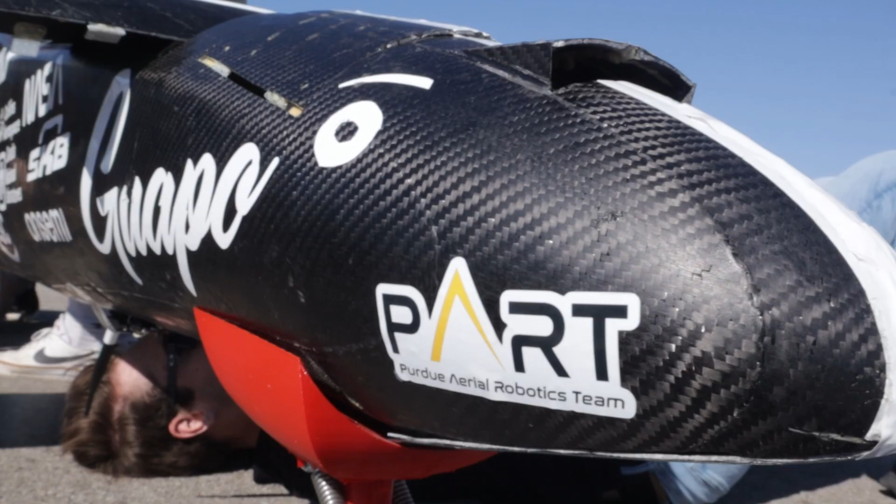Guapo is our 2023 competition UAS, designed, built, and tested by 50 Purdue students in over 10 majors. It is our largest ever manufactured aircraft with a wingspan of 13 feet and a weight of 48 pounds. Manufactured with over 90% carbon composite materials, it maintains a lighter internal structure and stronger overall design. Guapo has extremely redundant communication, hardware, and optics, which allows us to achieve all components in this year's mission.

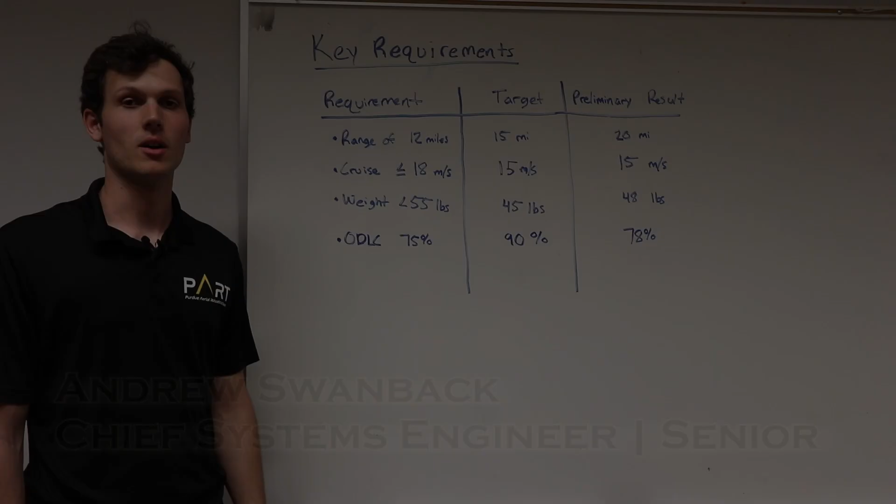So back in September, our team went through the rules and used our past experience to create a list of hundreds of L1 through L3 requirements that would inform the design of our aircraft as a whole. And I'll focus on a couple of the key requirements here and go through the rationale for why we chose them. So we knew from the rules that we'd need a range of at least 12 miles based on how far we might have to fly. So we targeted 15 miles for some buffer, and we are pleasantly surprised to have 20 miles of range so far with our current batteries.

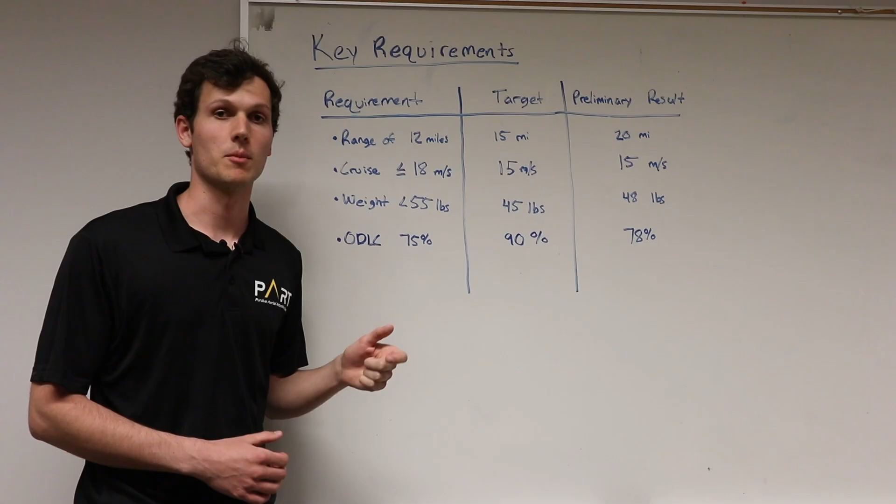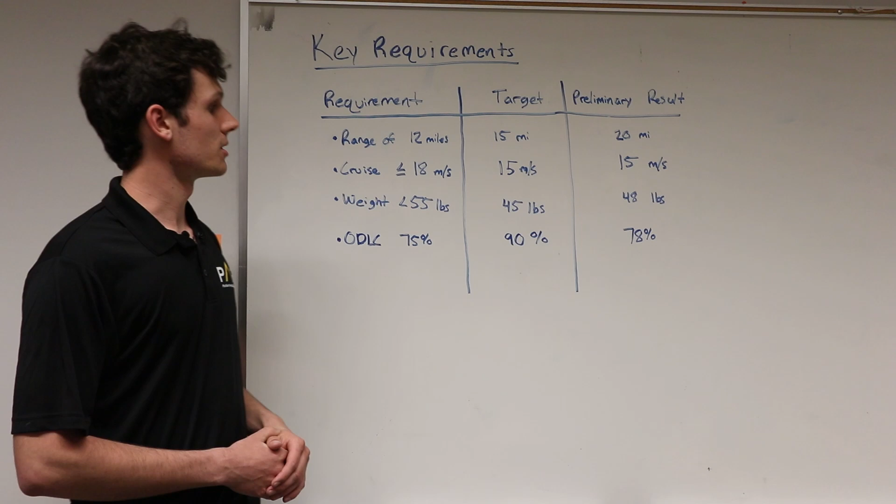We targeted a slow cruise less than 18 meters per second because that's the edge of our motion blur for our cameras for the recognition task. And we targeted 15 meters per second and have hit that value. The weight, we have to be under the FAA 55 pounds. We targeted 45 and we are slightly overweight at 48. And for ODLC, we figure with 3 out of 4 characteristics correct, we can do statistical inferencing and get all 5 of those targets recognized every time. So we're targeting 90% accuracy, but we think 78%, which we're at, will do the job, and we'll be tuning it in the coming month.

Our 2023 UAS package is comprised of 3 main subsystems. We have our ground control station, as well as a ground control station operator, which analyzes vehicle telemetry. We have our flight platform, which includes our physical UAS, as well as a safety pilot. And third of all, we have ODLC, which is mostly computers and algorithms.

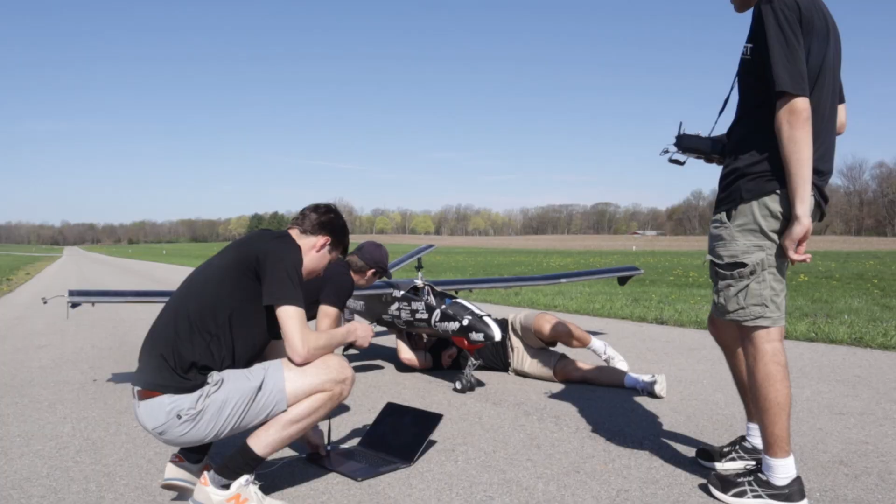One of the new features in our aircraft this year is off-board position control. And what this allows us to do is have more flexibility in our mission due to dynamic path planning. We also have a fully autonomous ODLC pipeline with the option of a manual override from an additional operator in case there was to be failure. Our UAV can be set up and operational in just under 15 minutes and has a flight time of 40 minutes as well as a breakdown time of 5 minutes, putting us well within the time limits of our mission.

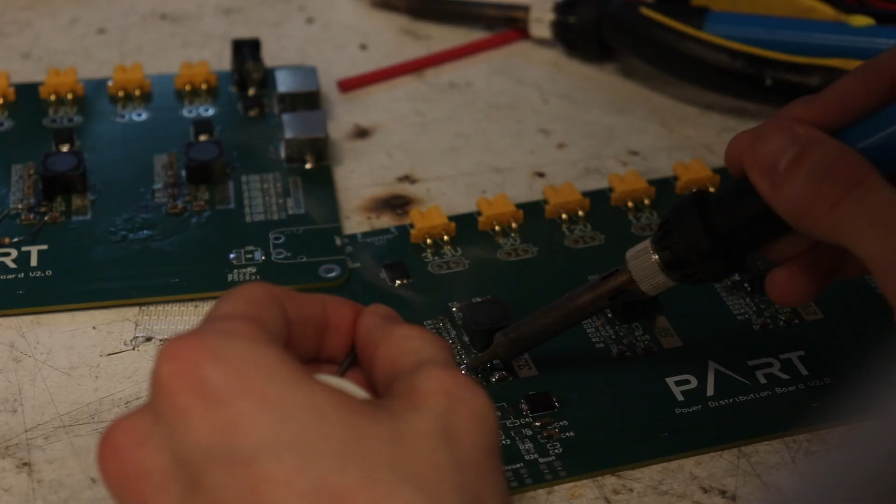The avionics board houses our Pixhawk, which communicates directly to our guidance, navigation, and control. It also allows us to reroute wiring so that we can easily wire the plane. The avionics team had to build many custom boards in order to fit our needs on Guapo. The first board we built was a power distribution board. Many of the components and many of the systems on the Guapo need to have a specified voltage. The power distribution board will receive an input voltage of 12 volts and it will output other voltages based on what those systems need.

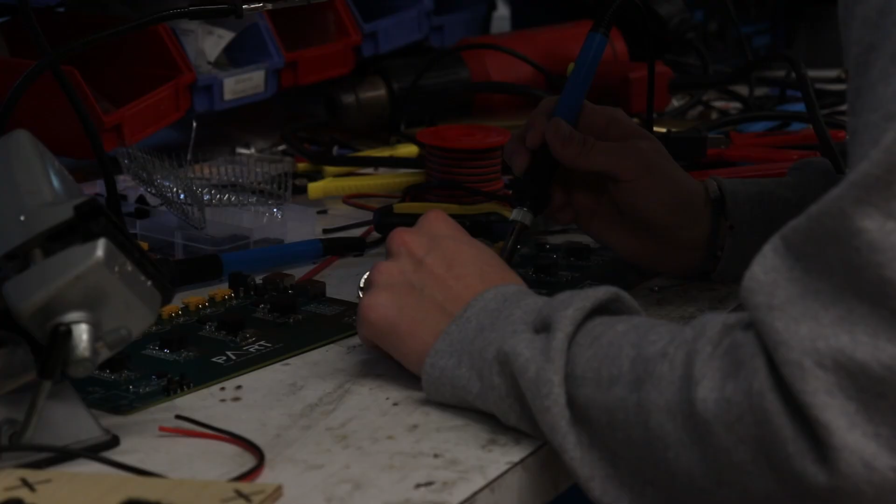Guapo is equipped with a 23 megapixel GoPro Hero 10 that provides our team with 5.3K image resolution. GoPro captures 5.3K video frames. Each frame is then sliced to 640 by 640 images, each of which are passed to a YOLO object detection model that identifies the target and determines its shape. Each target is then cropped and passed to a U-Net segmentation model that segments the target to shape and character. The mean RGB value is then calculated for both the shape and the character, and this value is passed to an RGB color classifier that determines the colors. Finally, all these values are used as inputs to a decision calculator that determines whether to drop the payload or not.

So our payload uses an interlocking mechanism that allows for easy access to the water bottle, and our parachute is spring-loaded. It is released using a time delay computer that begins counting upon the release of this limit switch. So here's an example.

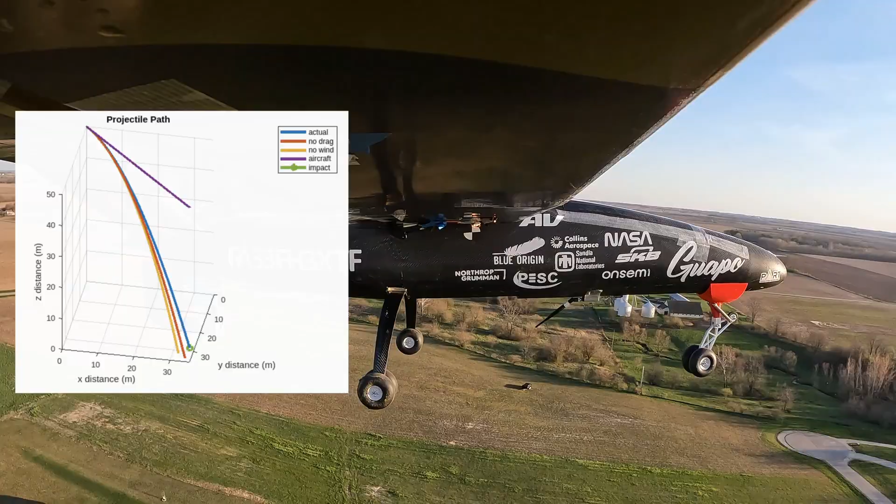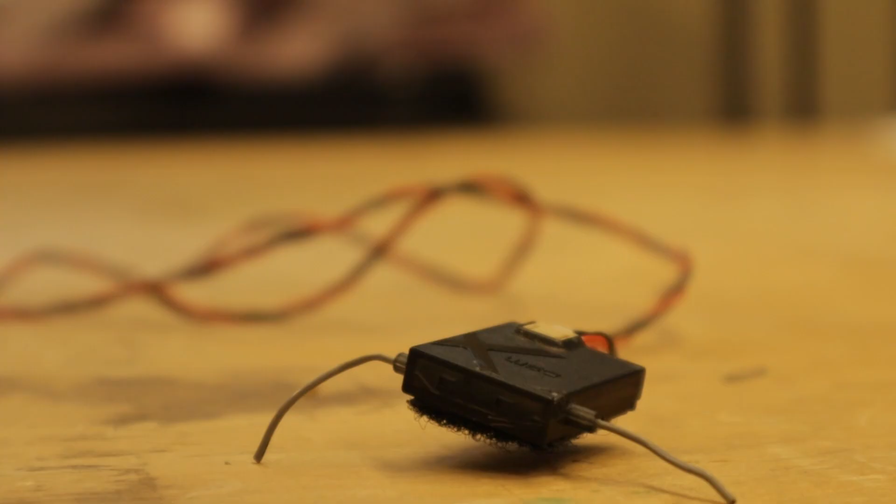The aircraft has 3 different modes of communication with the ground station. Our first mode is a 2.4 gigahertz RC radio connection. This allows the test pilot to take over in the event of an emergency, as well as for takeoffs and landings. The second mode of communication is a 915 megahertz telemetry radio.

This allows the aircraft to connect to the ground station, push telemetry, as well as receive different missions or different waypoints as we need to fly them on the aircraft. This gives us a full connection between the Pixhawk and our QGroundControl system on the ground.

Finally, we have a 2.4 gigahertz data link. Right now we're using omnidirectional antennas on the aircraft and then a directional patch antenna on the ground. This allows us to pull our images from the aircraft, crop them, annotate them, and then push them back up to the aircraft.

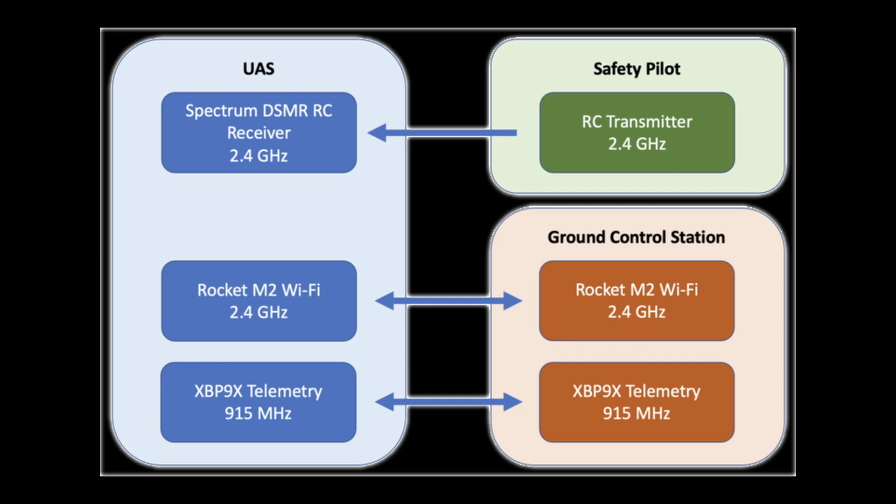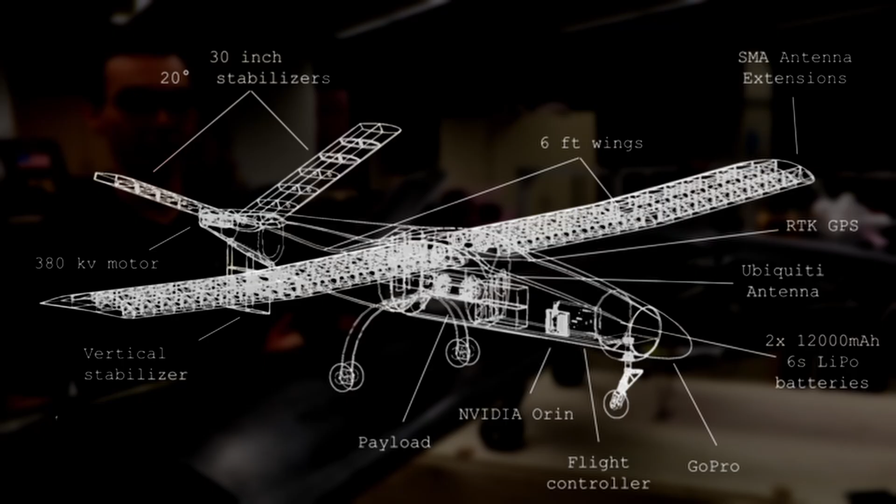Guapo has a 13-foot wingspan with a NACA 6415 chosen for its stall characteristics, featuring a polyhedral in the middle of each wing. Having this polyhedral in the middle allows us to use the same mold for both sides. We can make more with less molds. The control surfaces are split right in the middle of the aileron. This allows us to make custom flaperon mixing within the controls to allow for an easier slow flight capability.

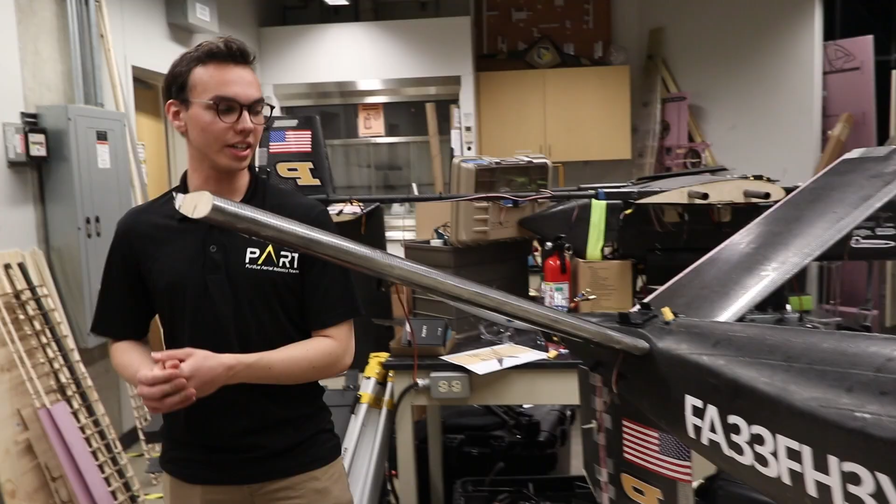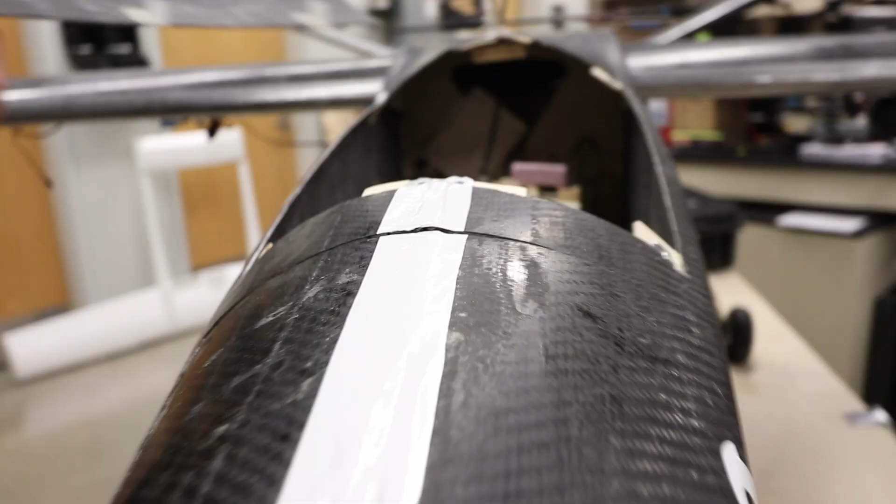As we move to the back of the aircraft, we have a V-tail featuring a 60-inch span on a 20-degree incline. We also have a motor, 380 KV, driving a 22-inch propeller. As we move to the front of the aircraft, we begin to see those propulsion batteries inside of the fuselage. These propulsion batteries are 6-cell, 12,000 milliamp hour each, and this provides up to 15 kilograms of thrust.

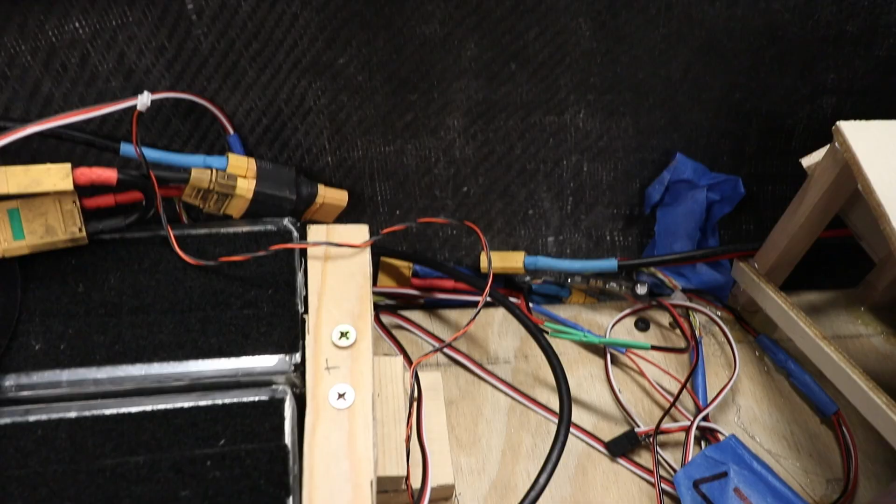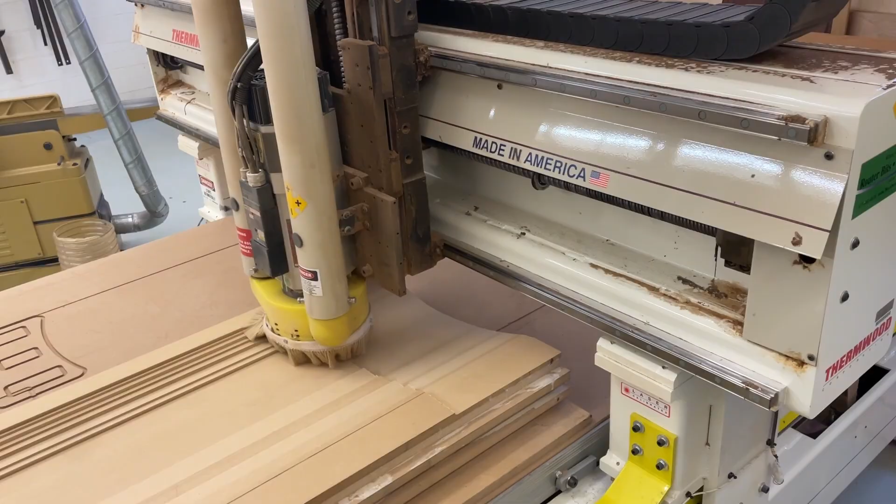At our cruise speed of about 15 meters per second, we can get about 40 minutes of flight with these 2 batteries alone. The landing gear is fully custom, allowing for high damping on a hard landing. The aircraft is fully carbon fiber with plywood internal structures. The fuselage features a core mat material to allow a stronger build, while the wings have a much thinner twill layer.

For autopilot, we're using a Pixhawk Cube. We developed our own breakout board for the Pixhawk Cube to allow it to interface with other devices and not be restricted to just the default breakout board provided by the Cube developers. On the Cube, we're running PX4. This allows us to both run mission or manual flights, as well as running off-board missions where off-board position set points are being sent to the Pixhawk to then fly our plane around.

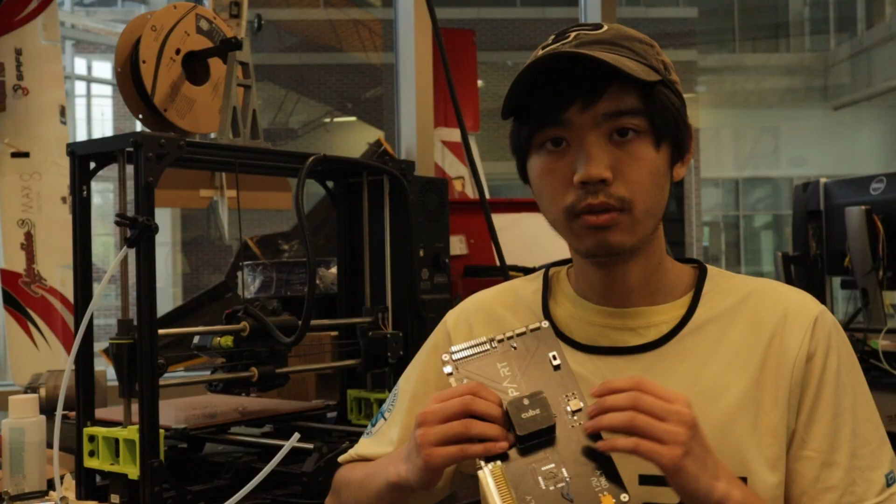For the off-board computer, we're running a ROS node on Xavier that sends positions such as latitude, longitude, altitude waypoints to the Pixhawk, which then in turn, through the Pixhawk control library, guides the plane towards its destination. This allows us to run autonomous missions that can dynamically change as the environment around an airplane also changes.

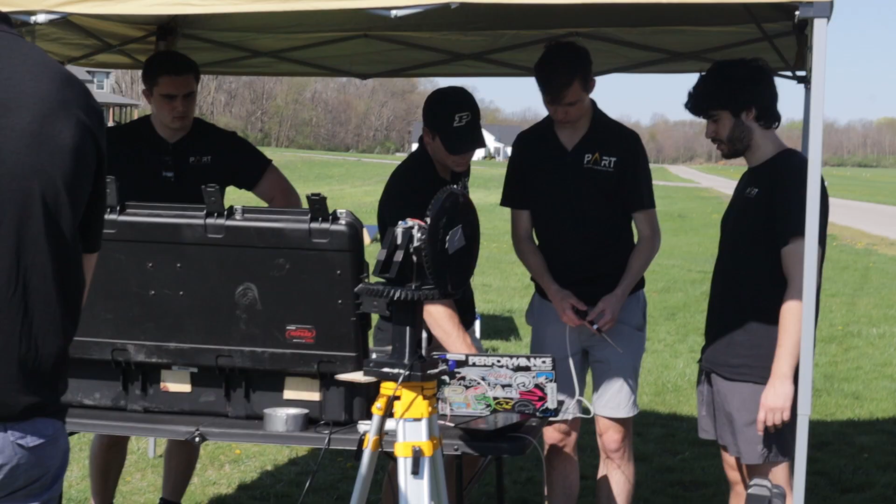Our ground control station features 3 different monitoring stations. One of them is our mission control station, the second is onboard system telemetry, and the third shows images of the aircraft in live time.

In the event that our aircraft encounters another aircraft in the airspace in front of it, we're able to detect it using a millimeter wave radar sensor from Texas Instruments that returns a point cloud of the space in front of it. We're able to find that obstacle using a point cloud returned from the sensor and then dynamically path plan around the obstacle until it's clear, and once we're clear, we can then resume the mission from the ODLC waypoints that we've plotted and then our standard path planning algorithms.

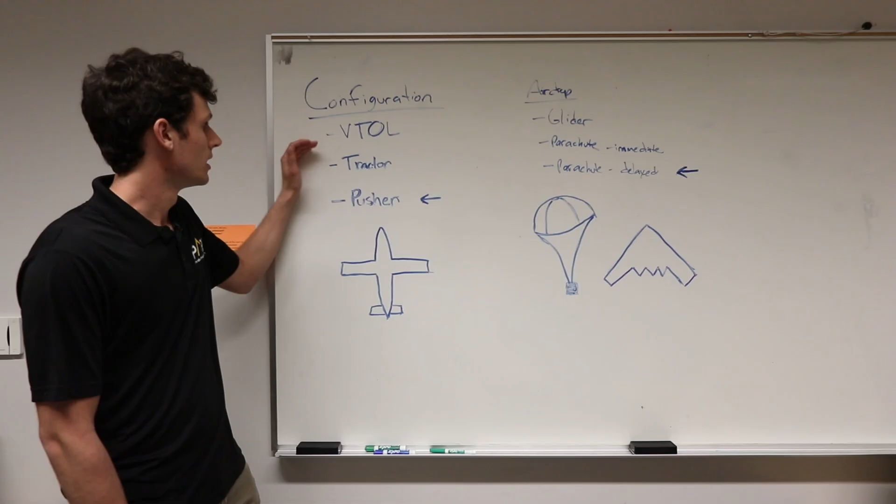So during the course of the design process, we considered a lot of different alternatives on our different sub-teams. Some of the important configuration options we had were VTOL, vertical takeoff and landing, tractor, or a pusher. And we ultimately decided that a VTOL, while it has a lot of key benefits, such as being able to hover over our airdrop area and being able to take off vertically for the other runways, was not worth the design complexity and had far too high of a risk.

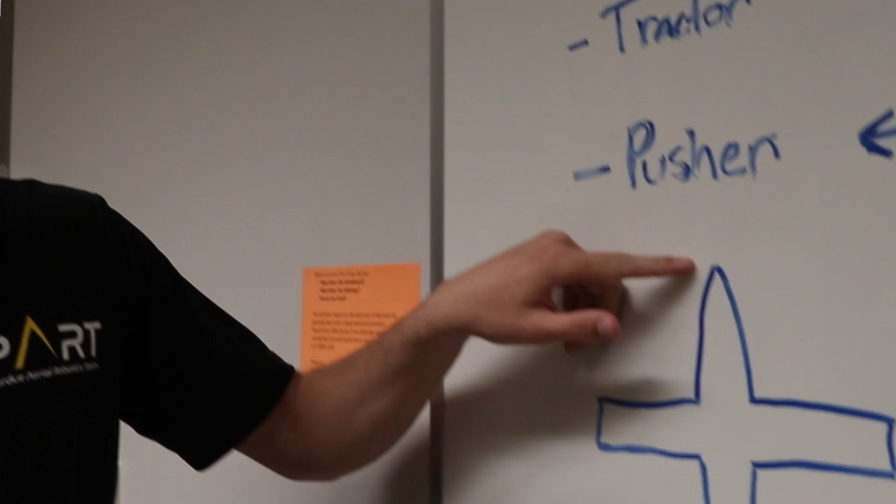So we decided to opt for a classic fixed-wing design with either a tractor or a pusher. And we decided ultimately that a pusher would be better because we could put a camera in the front and balance the CG better in the back with a pusher and also have less disturbed air for our optics.

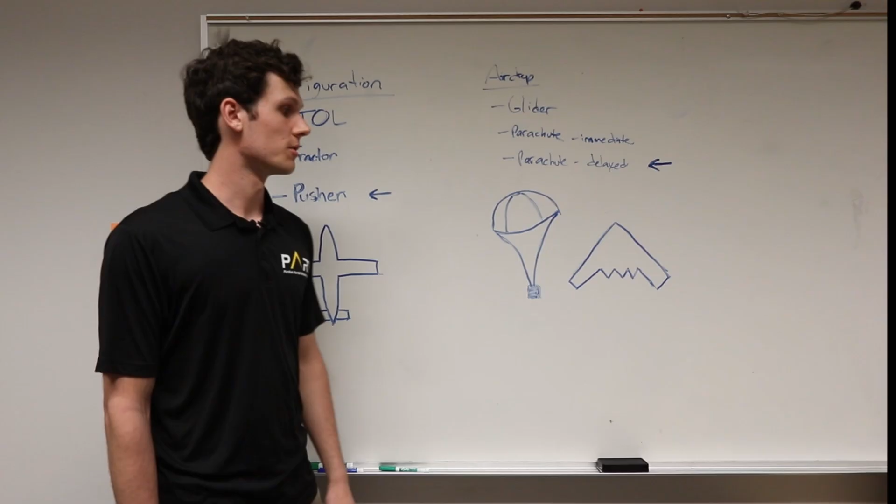For airdrop, we considered several different designs, the first of which being a glider. This glider would be controllable and steerable all the way down to the target. But this ultimately was decided to be too weight intensive and size intensive for our airframe. So we decided to go with a parachute solution.

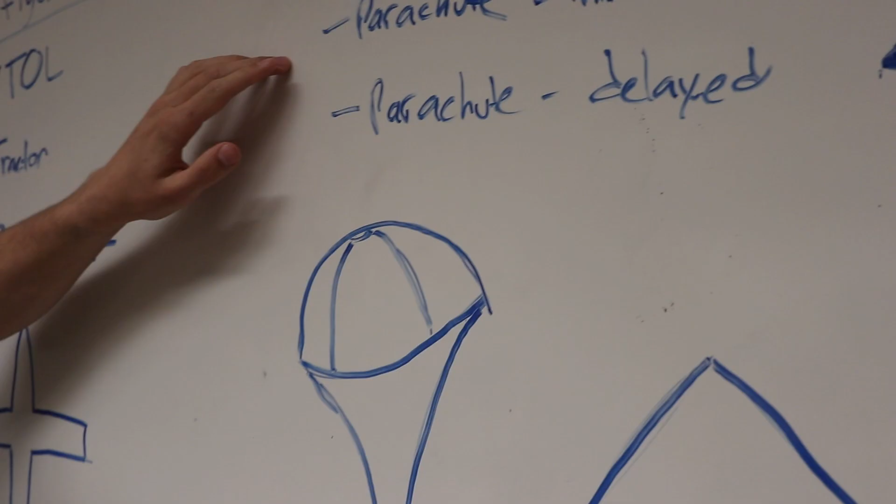Our two options were an immediate parachute drop or delayed parachute drop. Through testing and math, we determined that the immediate parachute drop would not have the required accuracy of 15 feet. And so we decided to opt for a delayed drop that would drop out of the aircraft and around 40 feet, some safe distance, would deploy a parachute.

Risk mitigation and safety are a key part of our goals here at the Purdue Aerial Robotics Team. We exercise safety and risk management anywhere from wearing safety glasses and respirators when we need them, to designing our testing plans around that, which is especially critical when we're testing out new hardware.

We also try to mitigate risks by testing out our technology on technology demonstrator aircraft that are cheap to replace and much easier to replace than our full-scale competition aircraft. Another part of our safety is that we always have an RTH feature built into our aircraft, so at any point if we were to lose comms or signal, the aircraft would automatically land itself back at the runway.

To evaluate the performance of the GoPro and other cameras, we had to come up with a variety of different testing methods. The first testing method is to evaluate how the GoPro handles very fast speeds of the plane. First, we flew the GoPro at 15 meters per second at about 100 feet up in the air. After doing multiple passes of different objects and of different sizes, we felt that the GoPro passed this test with flying colors.

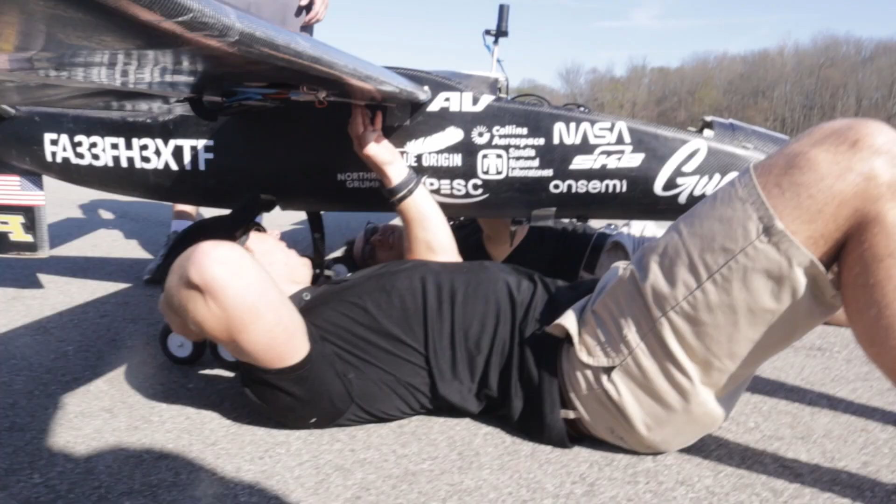The obstacle avoidance system on board the aircraft performed exceptionally as it was tested extensively on the ground and 5 times during flight. All 5 times, the aircraft detected and avoided the obstacle, resulting in a 100% success.

Our team has conducted 4 end-to-end mission tests in which we fly 12 miles of random waypoints, set up a target drop zone, deploy our payloads, and then land safely. We expect to use 2 to 3 overall operators during the competition and to hit 3 to 4 of the target areas. Our simulated mission scores are on average 70%, and we expect 85% total score at the competition.

The aircraft now is in mission mode, autonomous. We're flying at 35 meters above ground level, so a little bit over 100 feet. As we approach our first waypoint, we're going to make a left-hand turn.